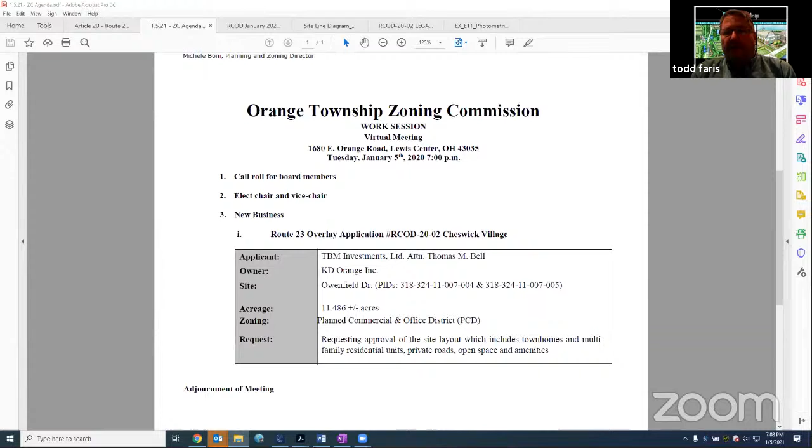Good evening, I'm Todd Faris with Faris Planning and Design. Tonight we have Tom Bell, who's the developer, as well as Mike Shade, the attorney, and Anna Vigetes, who is with Faris Planning and Design. We're here to answer questions regarding this application. I know you guys have seen this many times before. This is probably the least dense you've ever seen this, and only two stories, which is a good thing. We did meet informally and got comments from you folks a little while ago. Hopefully you have seen in the packet that we've responded to those and incorporated them into the package.

I know there's other comments we received from staff that we're generally in agreement with. The only thing we still have to work out is the sidewalk connection along the private internal roadway that services the Steak and Shake, the car wash, and Home Depot. Because everything we do out here requires Home Depot's approval, and we haven't been able to run that by them yet. We'll do that after tonight's meeting once we see what other comments come up, so we can give them a full package at once. They're getting tired of us going back multiple times, so we want to do it one last time.

Again, this is 2-story townhomes, 56 units on this site. Generally, we're complying with most of the requirements. There are a few divergences we're asking for, which staff has noted and I'm sure we'll go through tonight, but there's nothing egregious on this site plan.

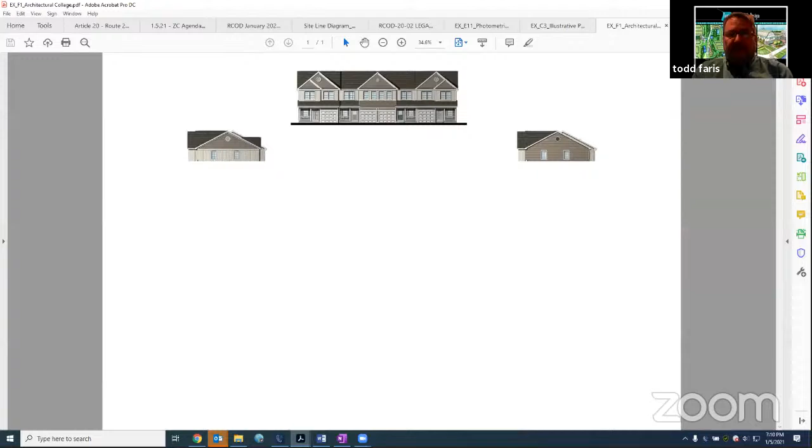So is that brief enough, Michele? Hey Todd, will you have approval from Home Depot before you go in front of the trustees? Yes, we've got approval for this site plan the way it is right now. It's just in case you guys came up with something else tonight other than that 5-foot sidewalk, we want to make sure we can get in front of them with everything before the trustees. Okay.

If you want to present that architecturally or not, Michele. Yeah, I'll follow the format on this one. No, it's okay, I mean just to give background to the commission members, we had our technical review meeting.

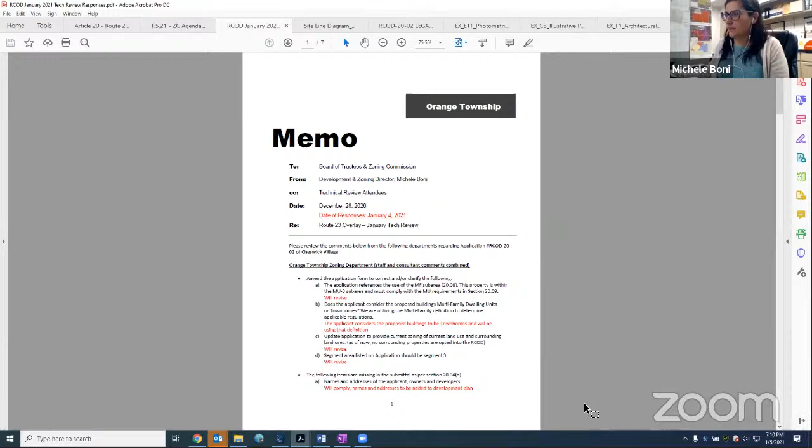When was that? Oh, December, before the new year. So December 29th, our regional planning consultant Holly Maddie, along with staff from the fire department and the zoning office, provided several comments from the meeting. The following day, we met with the applicant to go over each of these comments, and we asked them to provide a response, as Todd Faris said, and they agreed to comply with a majority of these.

The only thing still standing, as Todd mentioned, was the connectivity. Our office requested more of a pedestrian connection amongst the adjacent uses. We know Home Depot has very specific requirements, so there may be a barrier to connectivity there, but at least having some connectivity to the Steak and Shake and the other commercial uses around would help. So the applicant seems to be working on that.

I think that's it. We've had some public comments, and I forwarded you one we received in writing a few hours ago. I want to bring that up too, but I think we'll start with the commission's comments first, Adam, if that's all right. Sure, yeah.

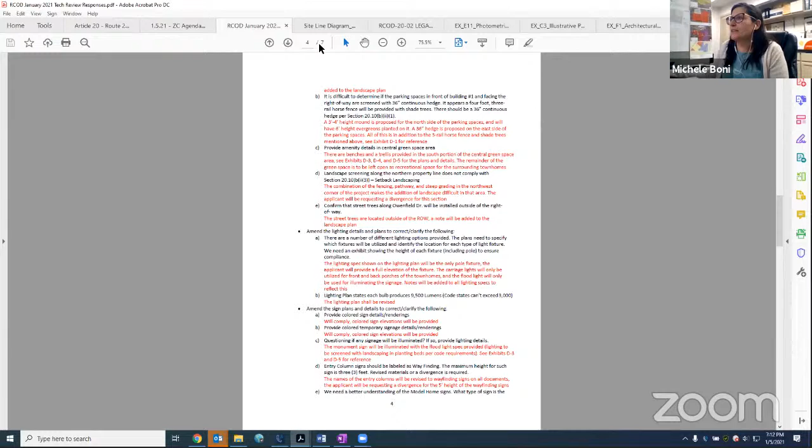Did you want to go over some of those comments? I'm sorry, I missed that last one. Well, I don't know if the commission members have any comments from the technical review. A lot of this is very minute, just some technical issues and inconsistencies that needed to be addressed. There were a few extra divergences added after reviewing the text, but staff doesn't believe any of them are substantial. I think the biggest thing we asked the applicant to provide prior to tonight's meeting is a sightline diagram, since this abuts a residential district, and those residents have started to reach out to us.

So I think having this diagram showing this type of screening will be beneficial. We have two conditions on the site: the top section, where the mound is, and the bottom section, where the existing stream and wooded area is. That's why we provided both, so we can see what's in there. And obviously the comments we received from one of the citizens, which we can go over later, address that bottom section.

Okay, that's good, let's touch on that now. I haven't been on the site so I haven't personally seen it, but the concern raised is that the mound isn't consistently the same size throughout, and some of the trees haven't fully bloomed over the years. Are all the homes along this property going to have the full screening as proposed here? Why wouldn't that be the same screening required of Home Depot?

It is the same screening because it exists there today, Dennis. What's there right now? The mound doesn't extend all the way to the south. I don't know the history of that, but I think it's because there was an existing wooded area, because that's where it stops. Right, but there was lots of demands placed on Home Depot for that mound.

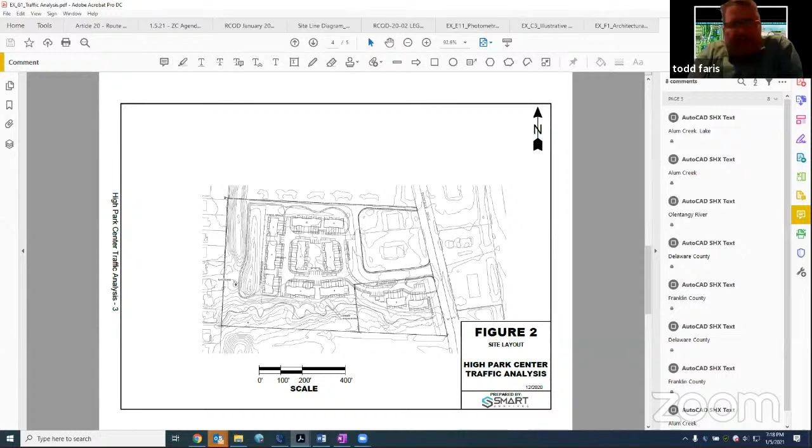We've met with Mike Love. The big thing for them, because originally we had our entrance on Owenfield Drive because that's where Home Depot wanted it, and they said absolutely not, you have to use that service road. So we've been down that road with them. But as far as the traffic counts on this, it's pretty minuscule for peak hour. Thank you.

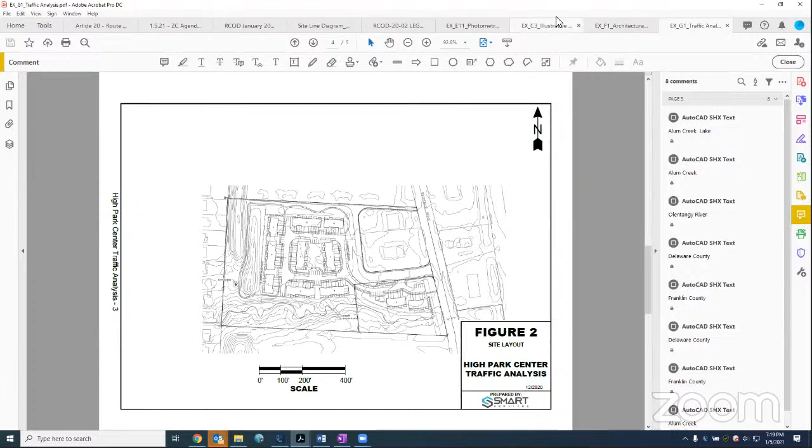Can we go back to the sightline drawing, Michele? This is probably more for the future, because I honestly think this is the best option we've seen on this parcel since I've been on the zoning commission. And like Todd says, we've had many come through here at 10 units per acre. Is the single family home being shown, Todd, a ranch or a 2-story?

Good question. No, the single families back there are typically 2 stories. Okay, so it would actually be taller than that. It would be the same height as what ours would be then.

So moving forward, since you do a lot of these presentations and applications, it'd probably be good to represent what's actually there. I know the one resident we got information from that Michele forwarded today was a ranch home, but if we're actually going to represent what's there and what's being seen, it'd probably be good to represent that. Yeah, good point. That's Glenside Drive in High Meadows Village, Green Meadows Village.

Todd Faris, would you be able to modify that to show a 2-story home for the trustees? Yeah, okay. Because we've heard that before, of 'we see the lights from the car wash from our second floor,' and it'd be good just to prove that you can, or probably not in the summer because of the trees, but in the winter you probably can. It's kind of hard to hide everything in the winter. It is what it is.

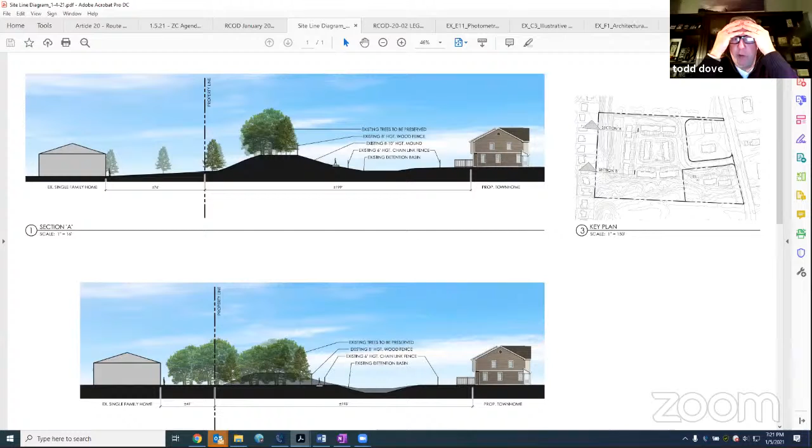Regarding the fence in terms of visibility, you talked about potentially fixing the parts that have been destroyed by trees. Is there any intention of raising the height of that fence so it's consistent across that mound? To be honest, we have not contemplated that. An 8-foot tall fence is pretty tall as it is. Any taller than that, we'd probably need a structural engineer involved, just from a wind loading standpoint. So I don't know what the township allows, to be honest.

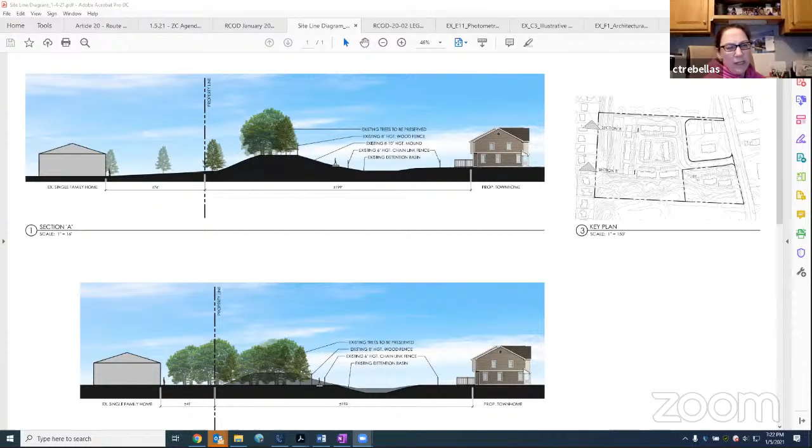My only concern was, if you go back to the landscape plan you had earlier, we were talking about the mounding. There's like a ravine creek, which you've colored in on the southeast portion of the property. I thought there was sort of a no-fill, no-build protected area along that ravine. Yeah, there is. I know the residents are concerned about access there, but I'm not sure how you can put a mound and a fence through a ravine. I think we want to protect the creek. That's a good point, Christine.

I think we're probably talking more about either a physical barrier like they're talking about, of evergreen trees closely spaced, or a fence that kind of almost follows that pathway that goes, well, where Michelle's been scribbling. You see that pathway down there? Because I can't go farther south, there's a stream and a stream corridor protection zone. I can't go down there.

Exactly. So I think if you meet with the property owner, you might want to remind him that a mound and a fence is not appropriate in that area. You might be able to put in some landscaping, but that's going to depend upon the topography and what it allows you to do. And I would definitely not recommend altering the topography for that protected creek bed. No, and we can't.

So, I like that. And once again, the Olentangy watershed standards, no matter what kind of stream it's defined to be, designate it as non-disturbance. Yeah, it's ephemeral, we know what it is. That's the lowest class, and it's still non-disturbance. Yeah, I think this is really important to communicate to the community. This is a really great point to bring up, because if there are concerns with the screening, there are limitations from a federal level, state level. The property owner might not be aware of it, but that's why we can't put a fence there.

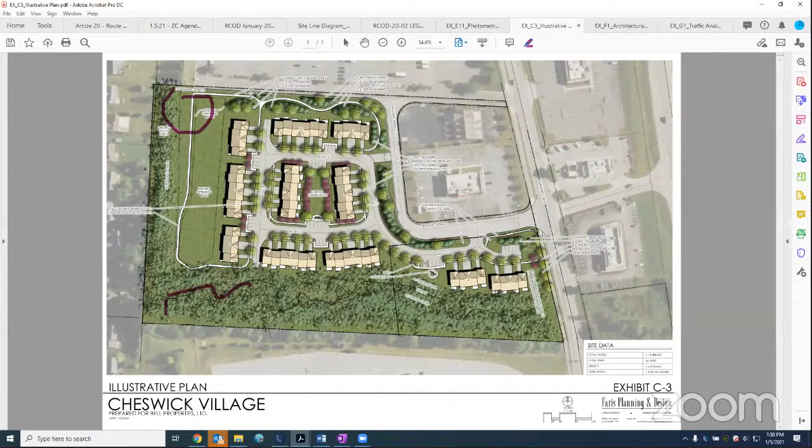I just assumed that, because when I looked at your stuff it said you were using part of it - part of it had another 3 acres, but it looked like you were missing 3 or 4 acres of stormwater drainage based on your calculations. So I assumed that has to be accounted for somewhere, and the county engineer implied you're going to have to modify your detention basin.

Because I do not fully support fixing up and spray painting the chain link fence. I don't think that's really going to be an asset to this green space where you have this nice little walking path, and you're providing amenities like that, and then you have a 6 foot or 5 foot tall chain link fence. I question keeping the chain link fence instead of replacing it with something more appropriate.

I don't disagree with you by any means - that's just my two cents. We're kind of dealt that hand by the county; it was their requirement to begin with. We actually wanted to get rid of that - is there a real need for it? Because that was one of the first comments we received from your board, and we approached them and they said no, that's got to stay.

Yeah, I would just assume get rid of the fence as well. I understand in some cases they're necessary for safety purposes, so people don't wander into a water area - that's fine. But there are a lot more attractive examples in the township than chain link, and for a walking path to border a chain link fence, I don't know if that's that inviting, put it that way.

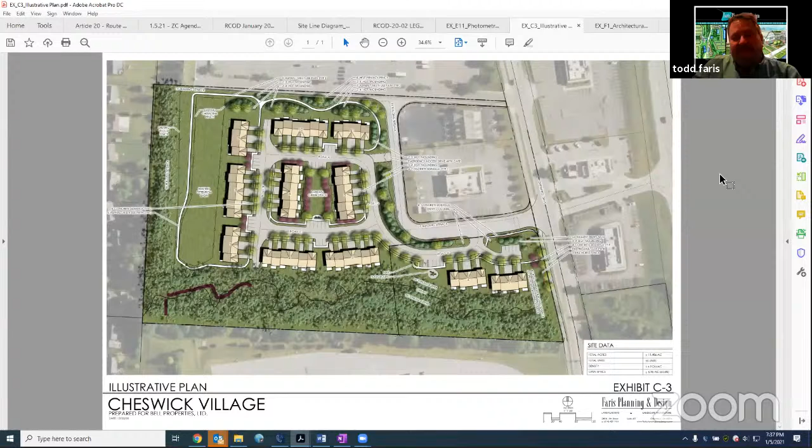I actually think the fence is a good idea in terms of privacy for these units. My only concern would be the first units, number 1 and 2, right by Owenfield, that they might not be as premium and might be difficult to lease or purchase. I wasn't sure what the ownership was of this, though not that it really matters.

But they've got that creek, not a ravine, but a creek, so I think they'll do fine there. Yeah, that was my concern, because otherwise you have a lovely view of the Steak and Shake parking lot.

Well, there is some fencing, it's 3 feet, but also landscaping too. So there's some screening, not as significant as abutting the residential, but there's some. We have a front face to it, and a little window so you can see us, but we do have the evergreen trees and the mounding there. And it's Owenfield, not 23, so it could be worse — more like a feeder road or service road. But I don't see this being as leasable or saleable as the other one, based on location.

Well, that's why the resident manager will be in one of those.

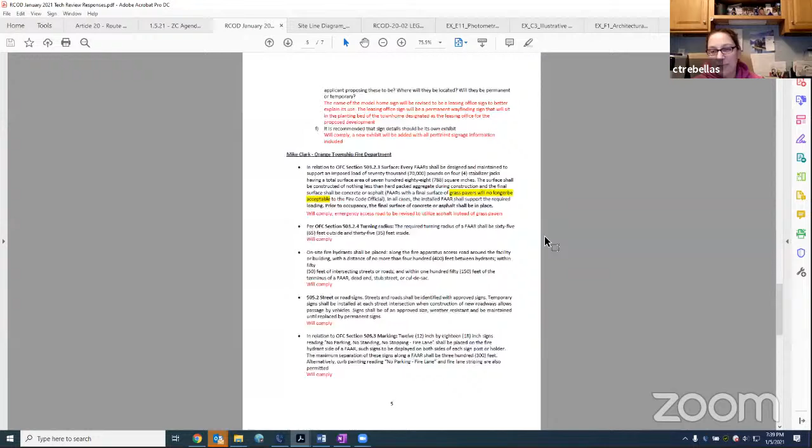The one question I did have — I saw there was a variance for temporary signage, requesting that the temporary marketing sign be allowed to remain for the duration of the lease-up period of the proposed development. How long do they anticipate that will take? Good question, we didn't talk about that. We just said we were going to use the same language that Schottenstein was going to use, because they liked that language better than ours.

So, okay, I guess I'm just concerned — and Michelle and the others can chime in — I don't want to have a permanent for-sale or for-lease sign on Owenfield Drive, like you see in some areas of the city.

Right, so this language supports what our current zoning resolution says. They can have a temporary sign permit valid for 6 months, and it's up to staff's discretion to renew it. Typically we'd stop allowing renewals once it's fully developed, and I think that language about being fully occupied gives you a time limit. So as long as there's a mechanism to say enough is enough — like I said, a permanent for-lease sign with balloons off of Owenfield Drive is not okay.

Right, so as long as Michelle is comfortable with the language and it's enforceable, then I'm happy. But that's just a concern of mine since there didn't seem to be a duration — it just seemed to ask for a semi-permanent sign. Yeah, there's a duration with the one we're copying from Schottenstein.

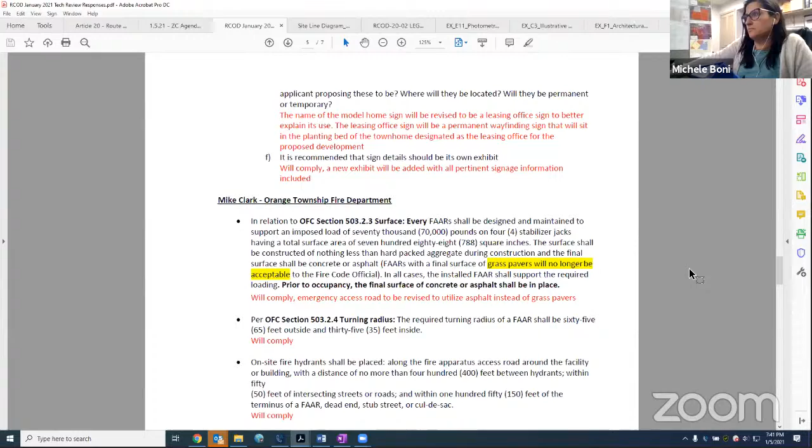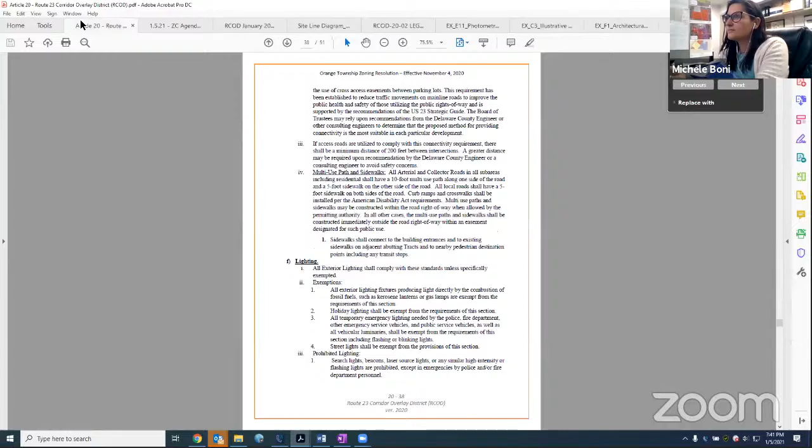Well, if we can touch on signage, Christine, since you made a comment — I noticed another thing, Todd, for the monument sign. The text code says it has to be 20 feet from the right of way, which it does. But there's another sentence in that code — it has to be set back a minimum of 20 feet from the right of way, and also needs to be set back within 50 feet of the edge of pavement to the entrance of the parcel.

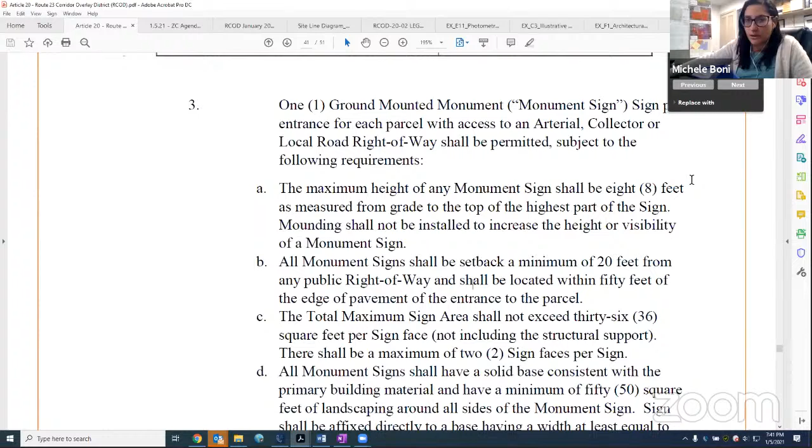So I questioned if this was 50 feet. I'm going to guess this is larger than 50 feet. I don't know, but we'll check that.

We can move that over and adjust the fence a little bit if we have to, to have a view corridor. I don't think that's an issue. But so it needs to be 50 feet off that incoming roadway, is what you're saying? Yes, my guess is that's probably about 30, just looking at it, but we'll double check.

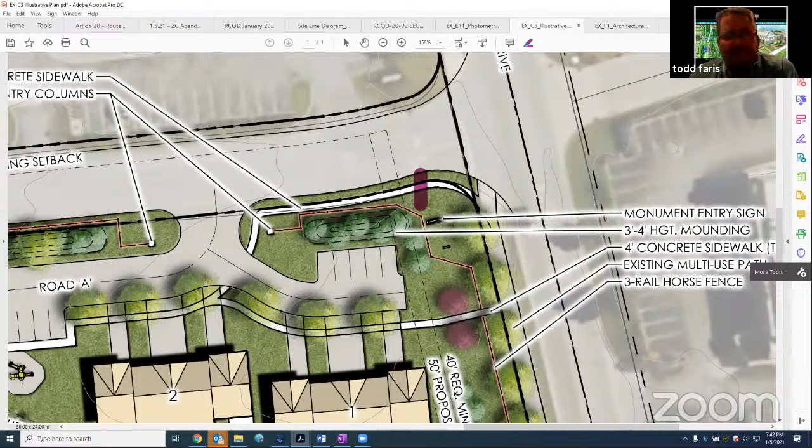Well, while we're zoomed in here, I think there's one thing in the staff comments that I kind of have a hard time seeing the hardship here, but it's in regards to this access point, in the requirement of it being 200 foot from another access point or Owenfield Drive. And it's a 25-foot difference.

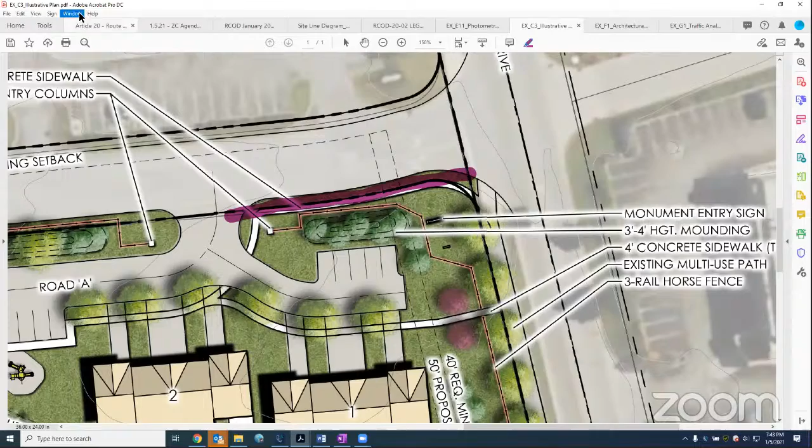I get the response that you had sent, that they were trying to center that up against the 2 access points across the street with the Steak and Shake over there. But I don't see where it would really have a significant impact if that was to go 25 foot further to the west. As far as where that would come into the site, you're still going to be in between those 2 access points, just not as centered as it's shown. Just help me understand why that's a divergence, when it doesn't seem like it would have a huge impact on the plan here if that was to shift over.

I don't think it would have a huge impact on the plan if it did shift over. Typically we try to center things between the 2 curb cuts, but again, 25 feet, if that is what everybody is looking for, it doesn't really change anything for us. It makes that one driveway a little bit longer, that one unit, but we're still under 150 feet, so fire's fine. I've looked at it from that standpoint. If there's as strong a desire for 200 feet, we can certainly move it.

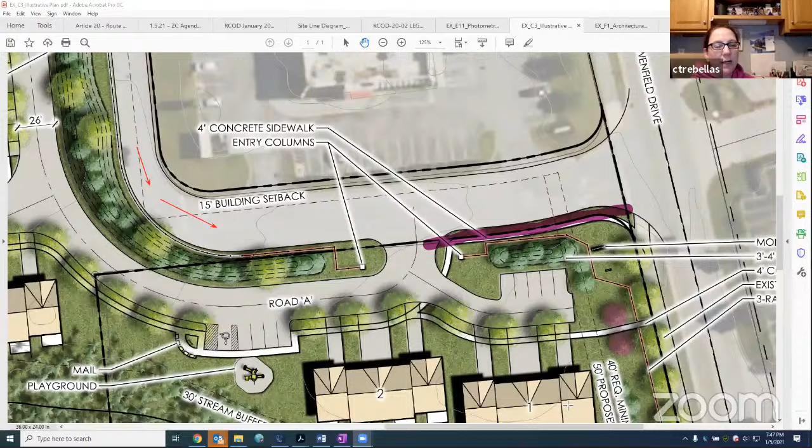Well Mike, you can become our traffic engineer. Thank you, I have no issues with where that road is because I don't think that's a heavily used path currently from the Home Depot, but with this development it could be. I agree not everybody off of Owenfield obeys traffic laws like they should. So I would say the divergence is not for it to be centered, but more of a safety factor. I would write that in your application, that it's for safety because of the curve and not for design aesthetic. Does that make sense? Yeah.

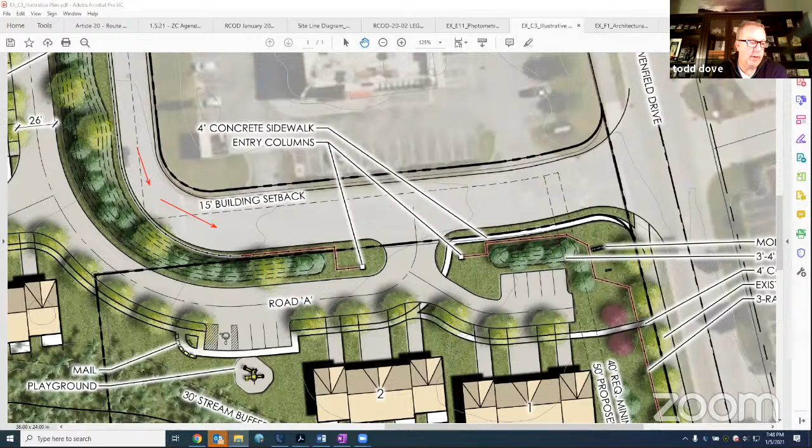I have a couple quick comments. On D5, there's the gate detail for the emergency access, which shows I think it's the 6-foot fence within an adjacent 6-foot fence. Is that the case, or is that where the split rail is?

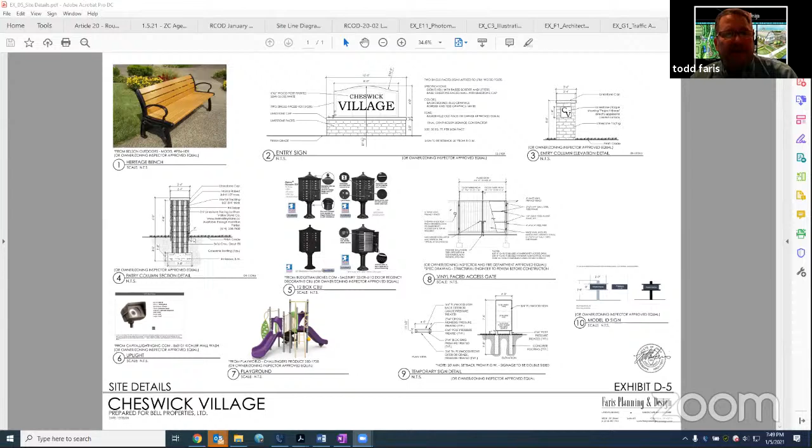It's detail 8. That gate, the fire department wants us to make that look like, so in that area it is a 6-foot high privacy fence. We're asking for a divergence from 5 to 6 for that, between us and Home Depot, because you're calling out 6 foot on the detail. So if we're extending it, I'm okay.

If it was just a freestanding, I thought that would look a little goofy. No, again, the fire department wants that to fully open, 2 10-foot wings or gates. So we're going to basically build it out of steel and attach the vinyl to the front of that to support it. And then it will have the Knox box, so it'll only be accessible from the fire department.

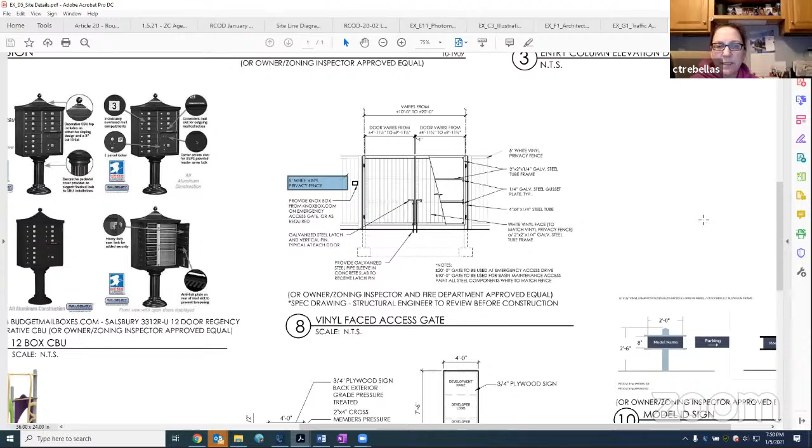But can you do me a favor and show me where this is real quick on the site plan? Any site plan will do. Can you see it yet? So it's the one that's, right, yeah, that's what I thought. Thank you. Yep, so it's like right behind the Steak and Shake and the car wash parking lot. Correct, yeah, correct.

Darn fire guy wanted 2 ways in. It's Todd Faris, thank you.

I don't think we talked about the 6 foot of that fence, so just make sure to clarify that in the divergence request. Then I think in the staff review there was talk about the building height. That's really not called out, what the max height is. I'm assuming it's under the 50 feet. Oh yeah, yeah, it's under 35 feet. We'll put that—I'm surprised it didn't show up on the architectural details, but we'll put it on these drawings as well, this one.

And then I know you're not doing really trash dumpsters. Is there going to be some sort of language in the requirements that trash cans are not to be in public view? Yeah, that's a policy that their management enforces. I just know how small our garages are getting these days, and to put a trash can in there too is sometimes a challenge.

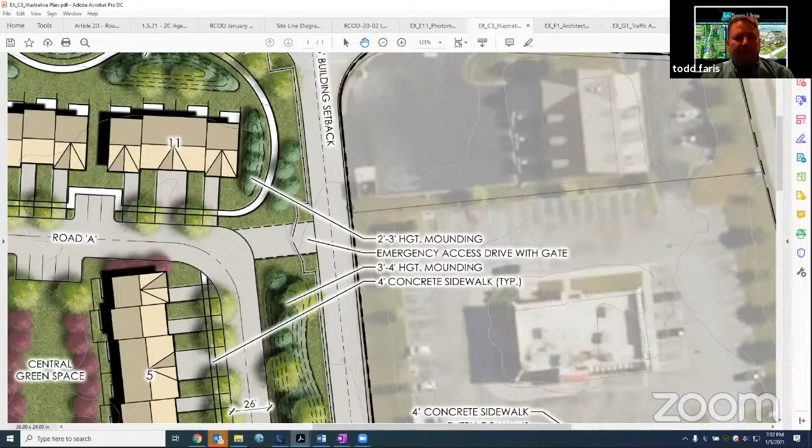And then just show them where we can put stuff. But just looking at it on the plan and everything else, I think we can make him much happier without doing a whole lot of stuff. Okay, yeah, that's great. I will forward you his contact information, and I spoke with him on the phone yesterday, and he had interest in going to the site with somebody.

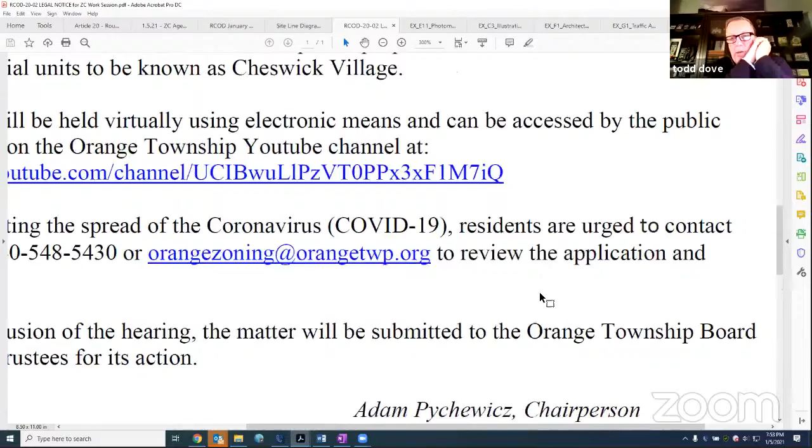I just know this is a new process, so it'd be nice to know what the public is saying as well. Michelle, can you let the public know when the trustees meeting will be so that if they want to attend and provide input at that meeting, they can do so?

Excellent point. The trustee hearing for this application will be Tuesday, January 19th at 6 p.m. You can tune in on the same YouTube channel link that you're watching here now.

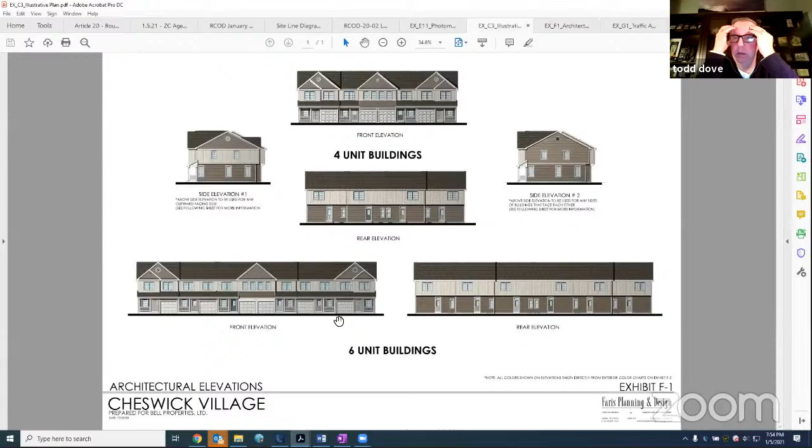And totally off topic, I saw today that the trustees are looking to have meetings back at 10 a.m. again. That's news to me. Okay.

I'm not sure. I know we've been considering changing the day of the week of the meetings. It might be moved to Wednesdays, but I saw them trying to go back to 10 a.m., which I didn't think was going to be a thing. And if it is, I really hope we don't have these zoning meetings at 10 a.m., that they're the evening sessions. Yes, I would agree with Todd that that would limit a lot of our capability to attend these meetings. We do have jobs.

On the Well, I will pass those concerns along to the trustees tomorrow. We're having our organizational meeting, so as far as I know, it's still, I'm looking at our agenda, it's still proposed as the first and third Monday at 6 p.m. So unless there's news, I don't know, but I'll let you know.

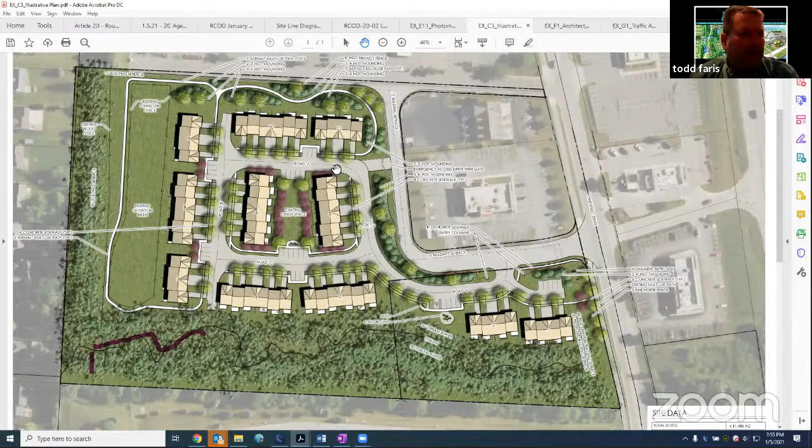I had one question before, or whatever you guys do with these types of meetings. You had comments about our lighting plan. We've taken a look at that. There were a couple of different things that happened. One, they used your multifamily code, which is very extensive for the amount of light and everything else, compared to the commercial overlay district here. So there was a difference on that, number one.

And number two, Tom usually gets his electricity installed and provided by AEP, and they provide and install the lights. We can't use theirs because the lumens on their light fixture are too great. They still use high pressure sodium of all things, and they're our providers, right? They're our leaders. So anyways, we're going to be going with an LED fixture to deal with this.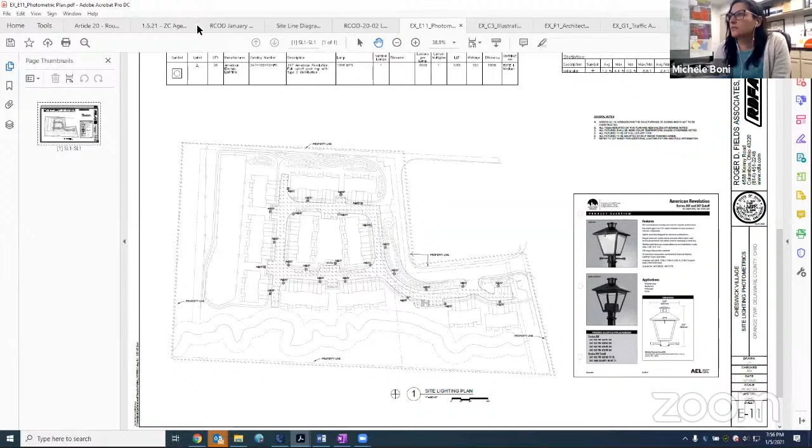Do you have a preference for the Kelvin? Right now they're saying 2700, which is more incandescent, but is that okay? I think that would work. There are guidelines in our code regarding the output because we had talked about how we prefer the warm LEDs as opposed to the cool LEDs. The cool LEDs, I think some people get a strobe effect from or something like that.

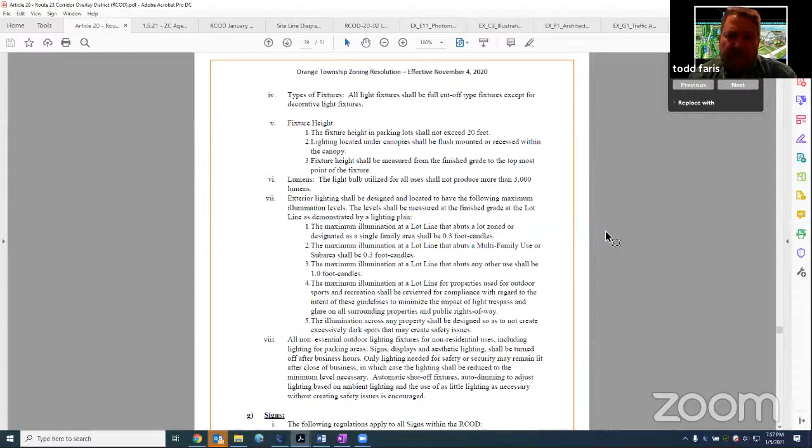So 2700 is probably the warmer, right? If I remember right, the lower the number, the more it's like an incandescent. Exactly. So I think Michele just pulled up our code where it's around 3000, but it's the warm LEDs, and that was a big issue with former people on the zoning commission. So we're looking at 16-foot height now, 2700 K, and much less light fixtures. That should make everybody happier.

So does that answer your question? I'm not sure. Well, yeah, it does. Since you pointed to the code that says it in there, we will make sure that we have that degree Kelvin that's called for in the code, because there were choices and I wanted to pick the right one. Okay, good.